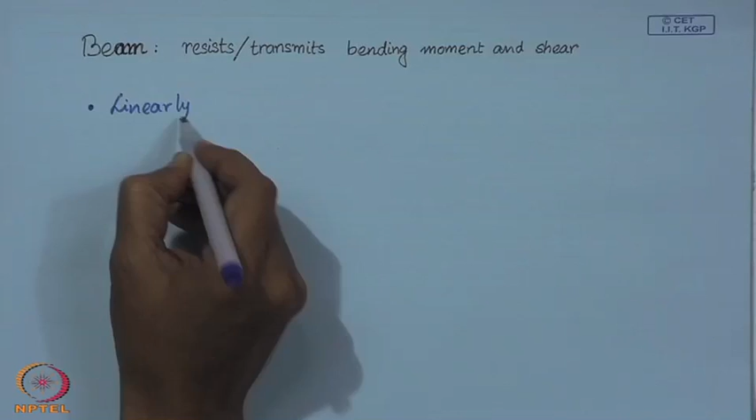The first assumption that we make is about the material: we will restrict ourselves to linear elastic material, which is of course also homogeneous and isotropic.

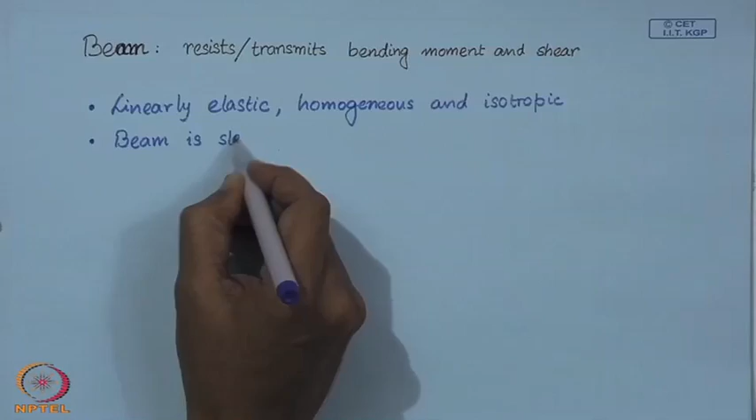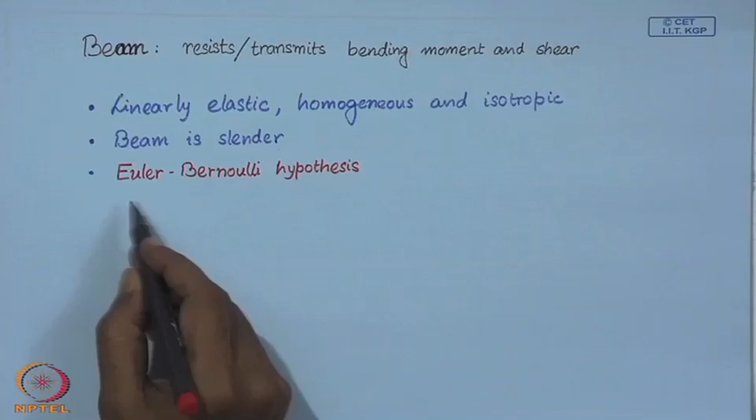The second assumption that we make is that the beam is slender. In today's lecture this will be an important assumption, under which there is this well known Euler-Bernoulli hypothesis. This Euler-Bernoulli hypothesis holds. So what this tells us is that suppose I have a beam.

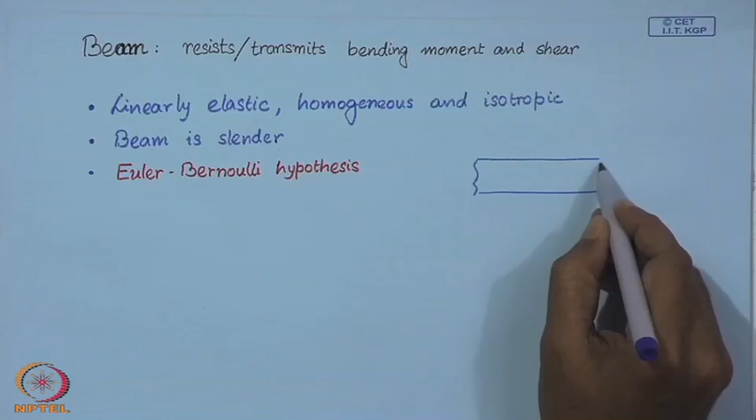So this is a section of a beam, and there is something called a neutral axis, or neutral fiber. When this beam deflects, it takes up a shape something like this.

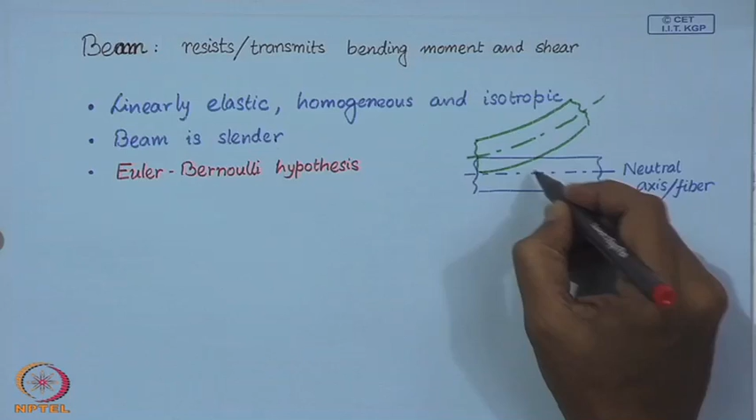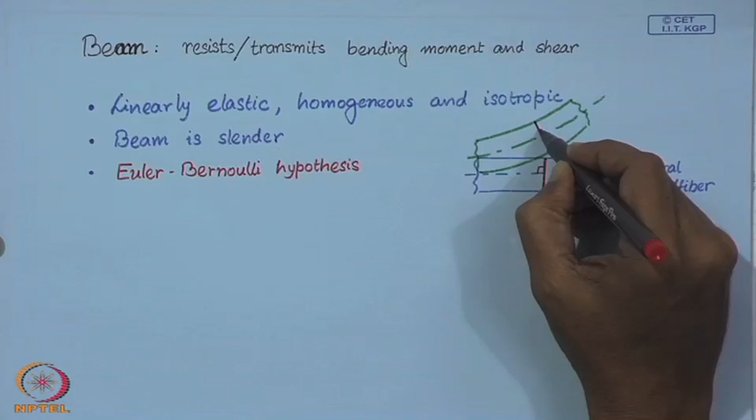So if you take a section of this beam before deflection, a plane section of this beam before deflection, which is perpendicular to this neutral fiber or neutral axis, then in the deformed configuration this section remains plane and remains perpendicular to the deformed neutral axis. So this is Euler-Bernoulli hypothesis.

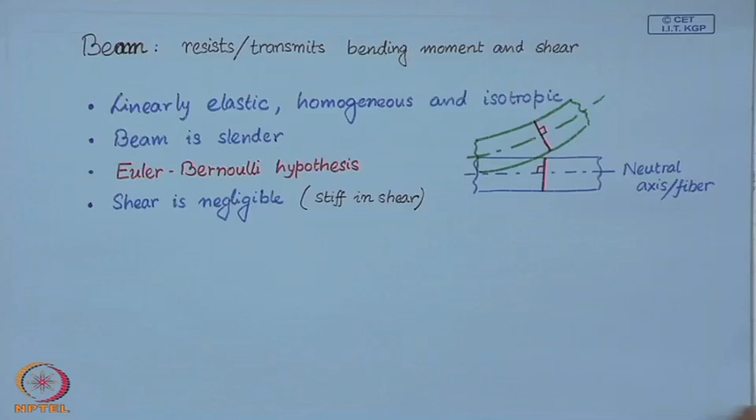Then we make the final assumption in the model that we are going to discuss today, that shear is negligible, or another way of saying this is that the beam is infinitely stiff in shear. So we will assume that the shear strain in the beam is negligible, and another way of saying this is that it is infinitely stiff in shear.

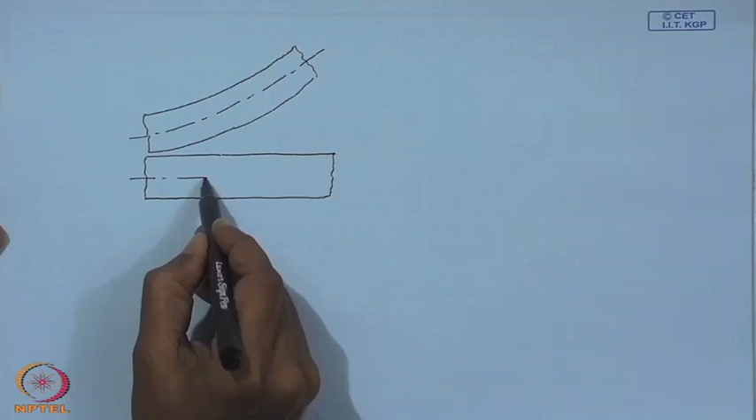So now with these assumptions, let us get down to modeling of the beam. So once again let me draw this section of the beam. So this is our neutral axis or neutral fiber. Now this is neutral, which means it is unstrained, it remains unstrained. So this axis in the undeformed configuration and in the deformed configuration remains unstrained.

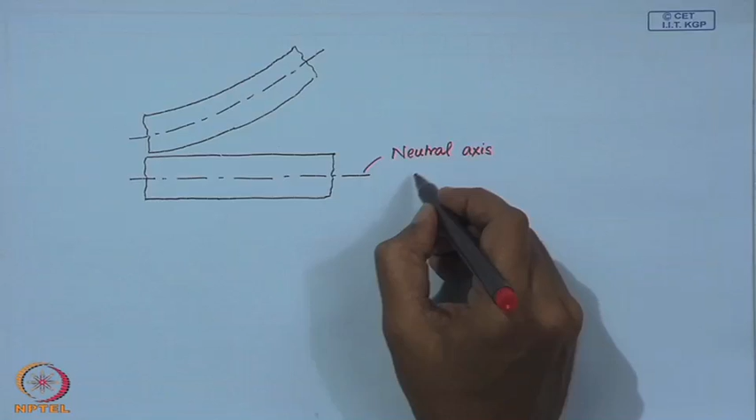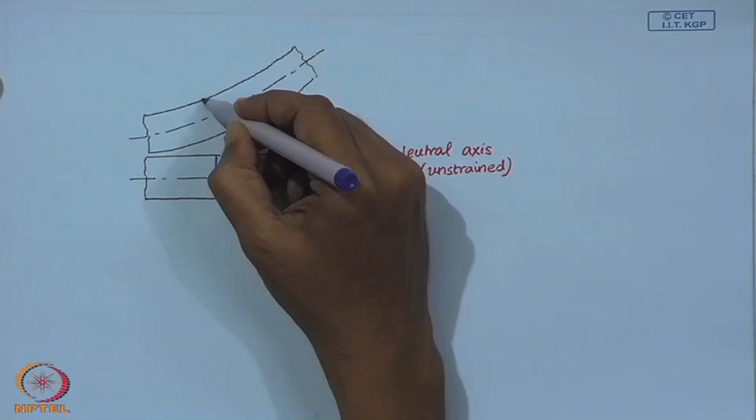So once again let us consider this element which upon deformation, this is an element which undergoes deformation. Let the depth of this beam or height of the beam be denoted by h.

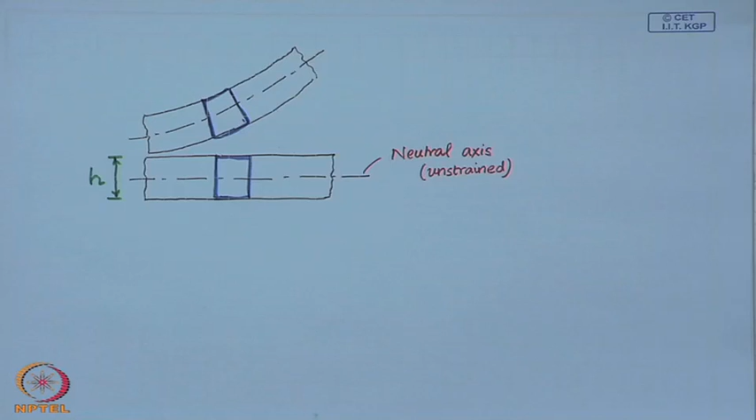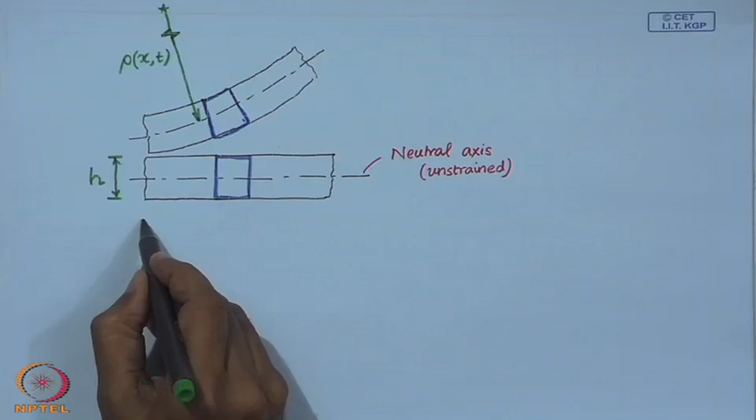Once this beam deforms, let us assume that the radius of curvature at this point, at x at time t, is given by rho of x and t. Now let us look at this element, let us draw the free body diagram of this element.

So let this element be of angle d theta in this plane. So this is an exaggerated figure. This angle is theta and the angular length is d theta.

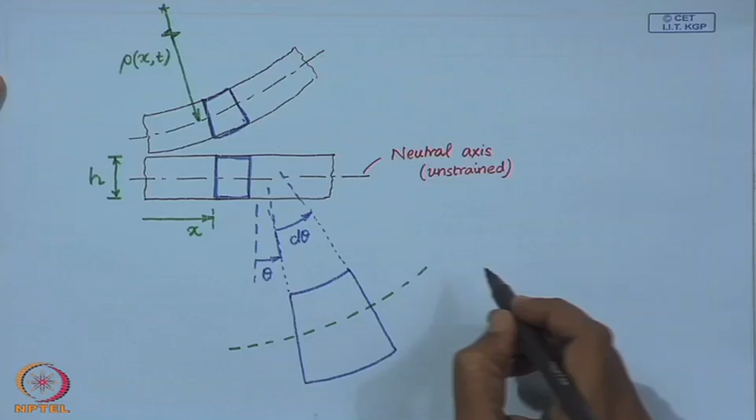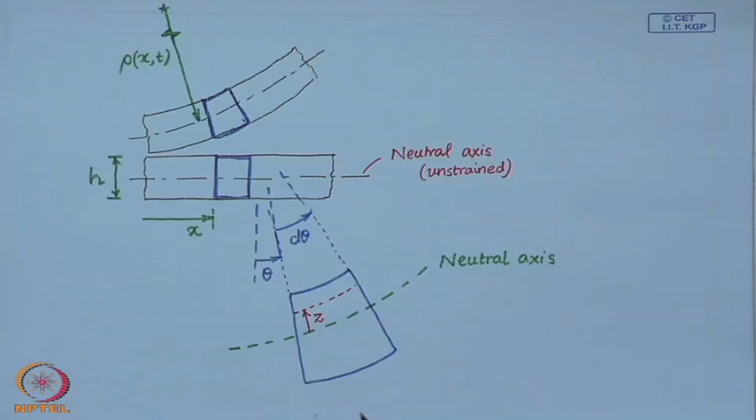Now let this be the neutral axis, then at a distance z measured from the neutral axis or the neutral fiber, let us look at another fiber. So we can write, first we are going to find out the strain in these fibers of the beam. As I mentioned, this neutral axis is unstrained. So let us look at another fiber which is at a height z from the neutral axis or the neutral fiber. Then I can write the strain as...

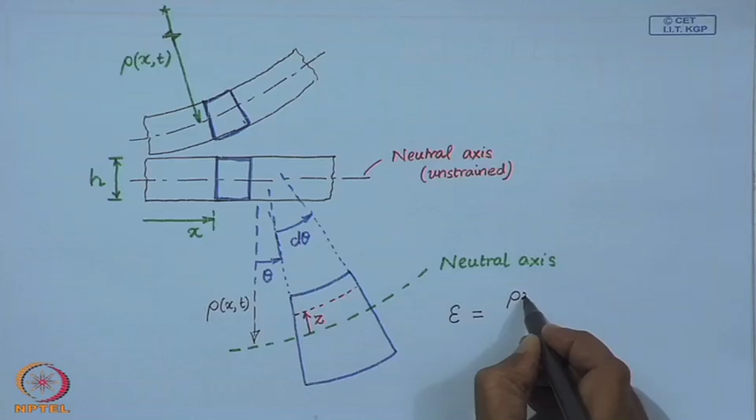So first I have to write the length of this fiber. Now this radius of curvature is rho. So the deformed length of this fiber can be written as rho minus z, times d theta. That is the length of this fiber. Its undeformed length before deformation, as you can see, is the same as rho times d theta. So since this length remains unchanged, this in the undeformed configuration was of the same length as this.

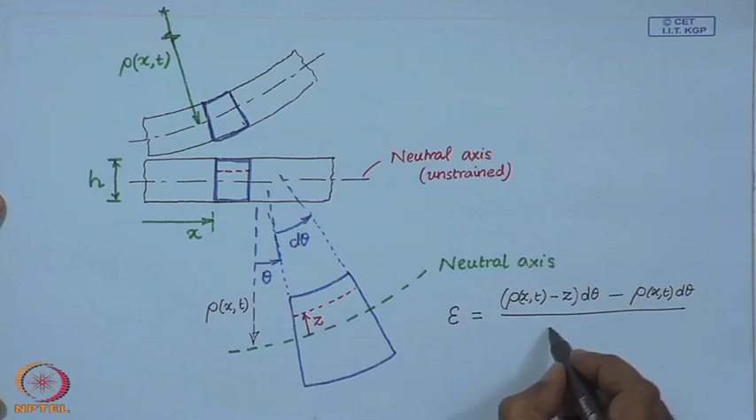So, its initial length was rho times d theta, and the initial length... therefore this turns out to be 1 over rho, 1 over the radius of curvature.

This is known as the curvature, and the expression of curvature in terms of the equation of this neutral fiber, if you represent that equation of the neutral fiber.

W x comma t is the displacement of this point from the undeformed configuration. So, the equation of this curve is given by W x comma t at any time t.

In terms of the equation of this curve, the curvature can be written as the double derivative with respect to x of W, divided by 1 plus del W del x whole square, raised to power 3 over 2.

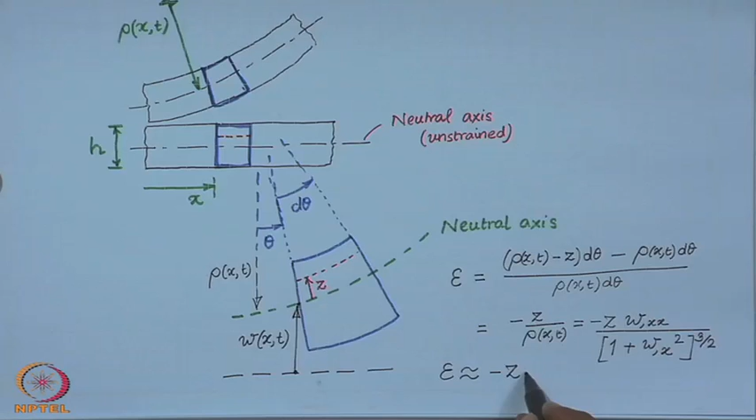As minus of z times the second derivative with respect to x of W. So, W is our field variable. This is under the assumption that the slope of the beam at any location is much smaller than 1, so our strain simplifies to this expression.

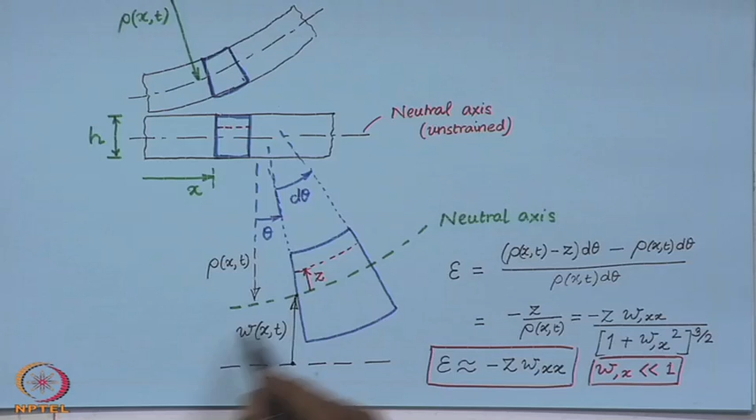This is the strain in this fiber at a height z measured from the neutral axis, and thus we have the strain in terms of the deflection of the neutral axis, which is what we are going to track. So, the deflection of the beam will be represented in terms of the deflection of its neutral axis.

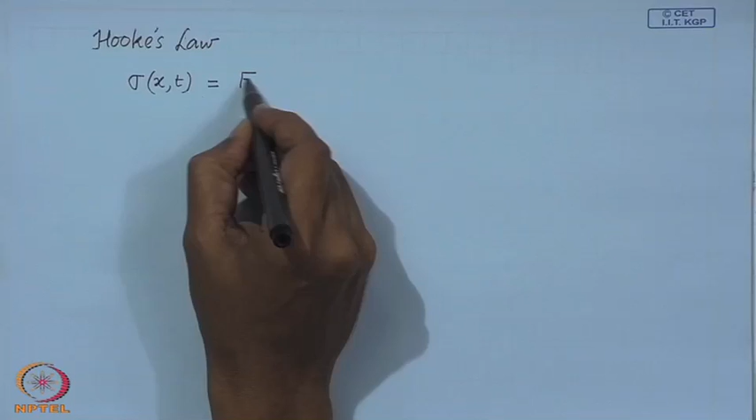Once we have this expression of strain, we can bring in the constitutive relation using Hooke's law, and we can write the stress in that fiber at a location x at time t. This is the axial stress in the axial fibers of the beam at a location z measured from the neutral axis.

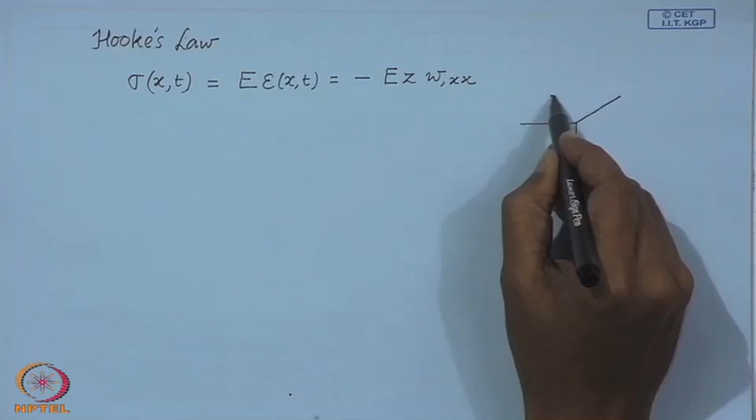Now, this stress, as you can see, is linear in z. So, let us consider a cross section of this beam.

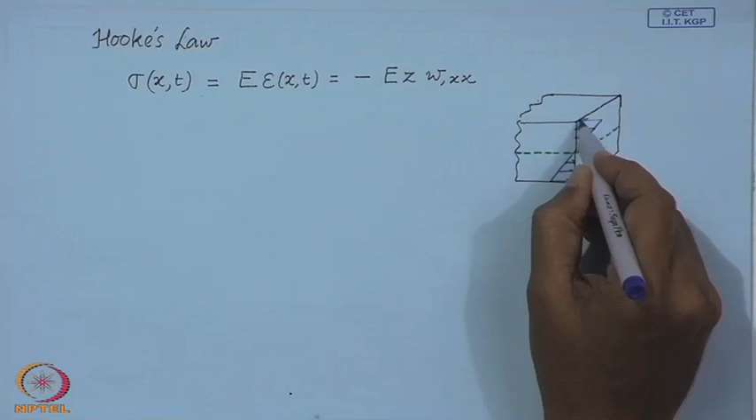This is the neutral fiber plane, and if you represent the stress, then if z is positive, we are measuring z from the neutral axis positive upwards.

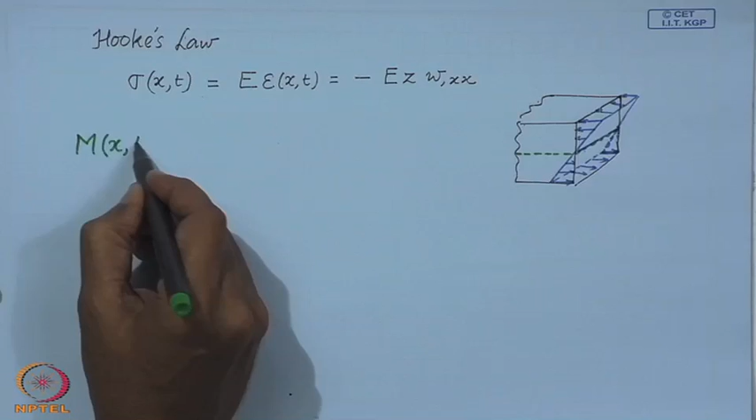Now what we want to find out is the moment that comes because of this stress distribution on the cross section of the beam. So, the moment at any location x at any time t will be given by.

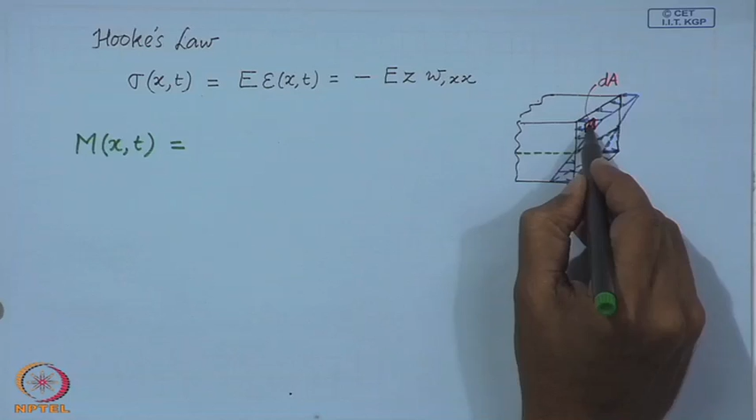If dA is a little elemental area on this cross section, then the force acting on this area is given by sigma times dA, and the moment about the neutral axis, because we are going to find the moment about the neutral axis because of this stress distribution, is given by this arm z cross this force, and if you do that calculation, that turns out to be negative of this, integrated over the total area A.

If you now substitute these expressions, this negative and this negative turns out to be positive. Now Young's modulus and the curvature, the approximate curvature, does not depend on this area integral, so that can come outside, and what we have here is...

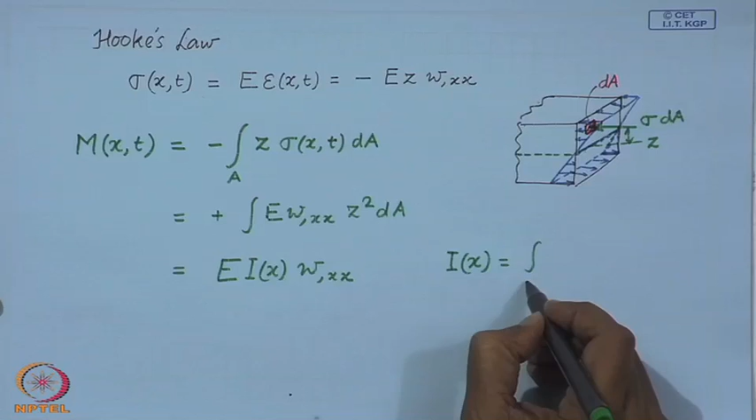This is known as the second moment of the area, about the neutral axis. So, this is the moment that is acting on this cross section.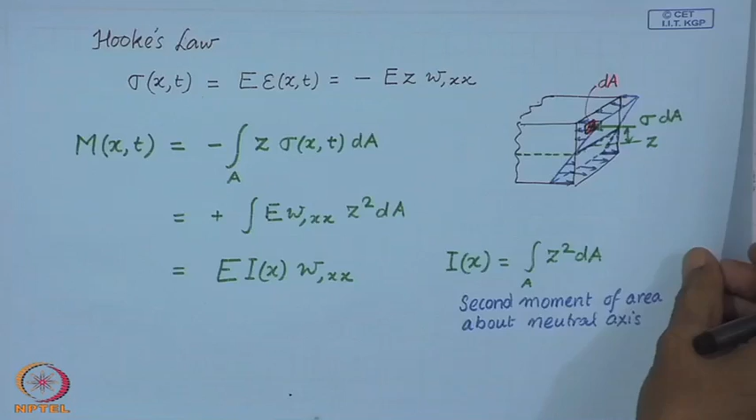Now, let us once again look at the free body diagram of this little element of the beam, and introduce the interaction forces. So, we have the shear forces at these faces.

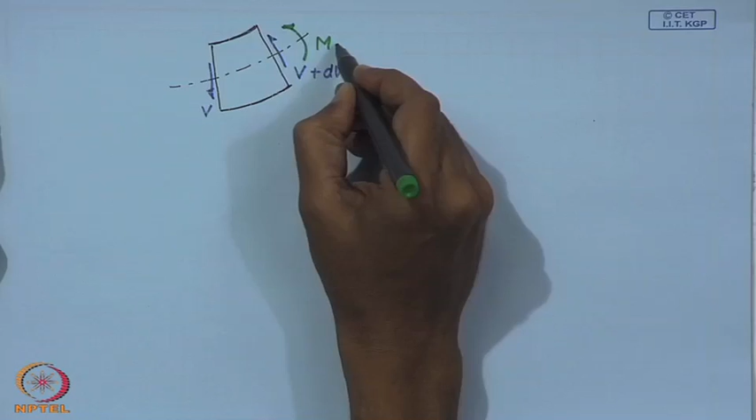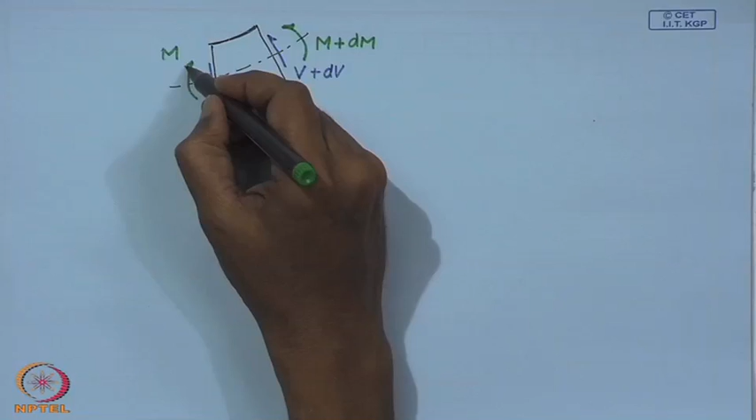And the bending moments. So, the sign convention that we follow: this is the positive shear force and bending moment.

So, this is the undeformed neutral axis, and this deflection is W x comma t.

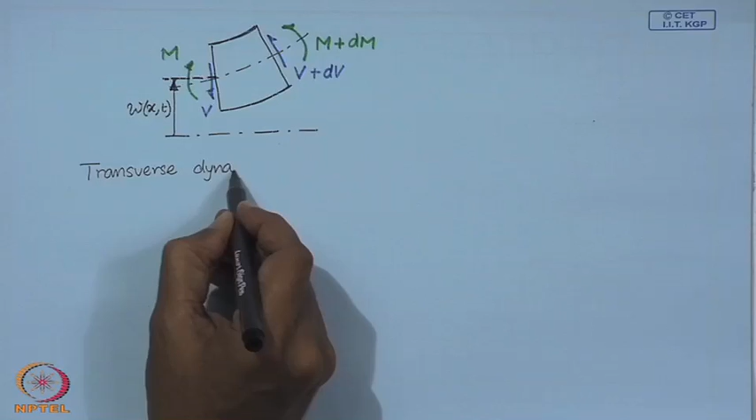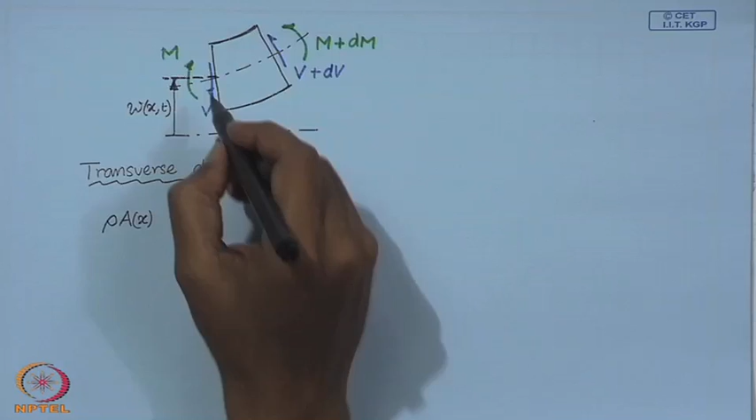Now let me write down the transverse dynamics, the equations of transverse dynamics of this little element whose free body diagram I have drawn. From Newton's second law, if rho is the density of the material and A is the cross sectional area at this location x.

Then rho times A is the mass per unit length, into dx, which is the length of this element. Then this is the mass of this little element times its transverse acceleration must be equal to... so, I can write...

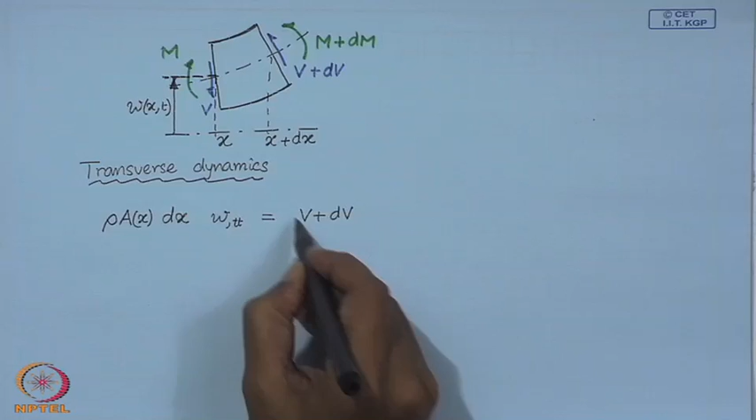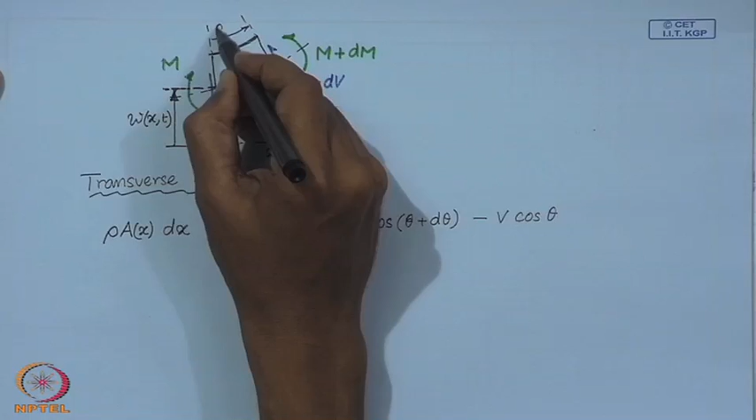Where, what I have indicated before, this angle is d theta and this angle is theta. So, I have taken the projection of these forces in the transverse direction, and if you divide by dx and consider that cos theta is approximately equal to 1, then this is the equation of transverse dynamics for the beam element.

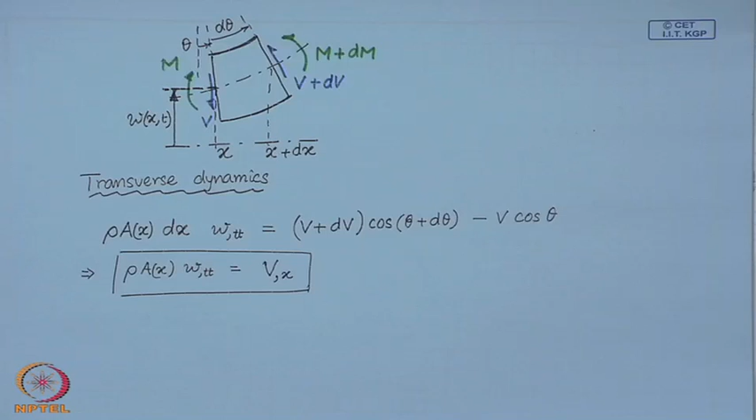Now, along with the transverse dynamics, I will also write the rotational dynamics.

If rho is the density of the material and I is the second moment of the area about the neutral axis, then rho times I gives us the moment of inertia of this element about this axis, which is perpendicular to the plane of this paper. This is per unit length, moment of inertia per unit length, so times dx will give us the moment of inertia of this element.

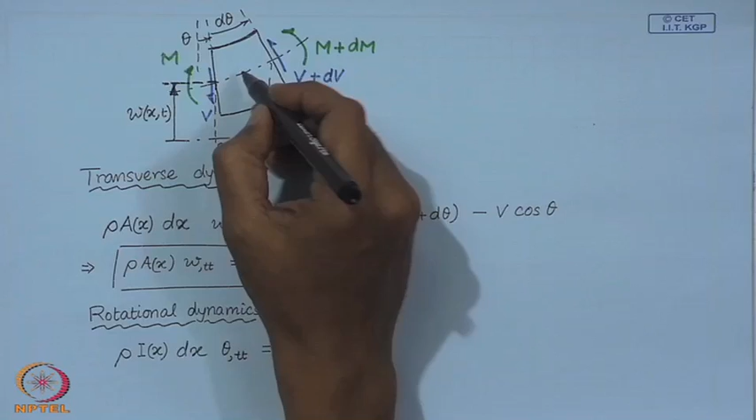This angular acceleration can be written as the double time derivative of this angle theta of the element, and this must be equal to the sum of all moments about the center of mass of the element. We are writing this rotational dynamics about the center of mass.

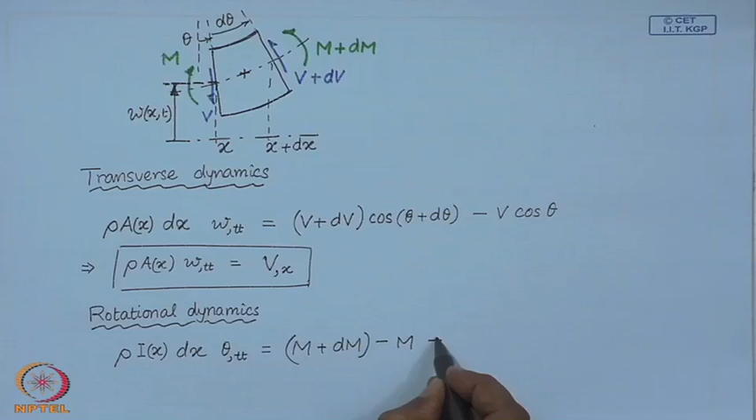So that turns out to be this, which implies, upon dividing throughout by dx...

Now this theta has to be somehow represented in terms of w. We know that tan of theta for small slopes is almost equal to sine of theta, which is almost equal to theta, and tan theta is nothing but the slope of the beam. Therefore, theta is approximately the slope of the beam.

Therefore, from here I can rewrite this equation as... Now, you see in these two equations, the bending moment M we have represented in terms of the stress, which was calculated in terms of strain, which was calculated in terms of the deflection of the neutral axis, or our field variable w.

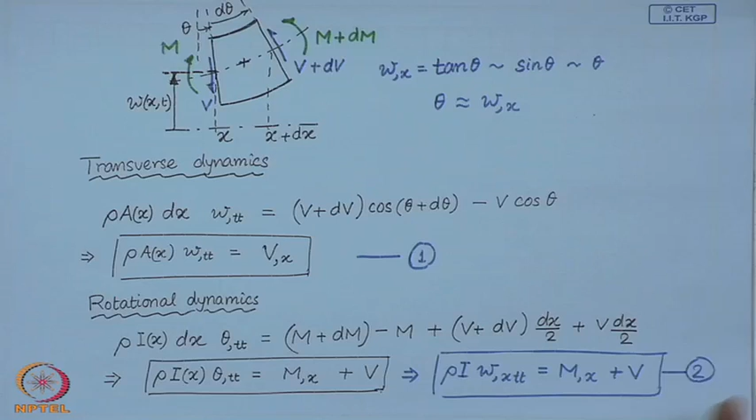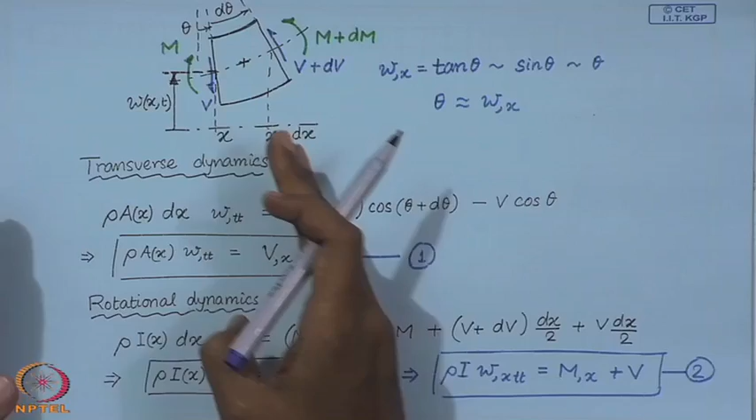Now this V, which is the shear force, is determined from these equations of equilibrium, because this element is not shearing. So this has to be determined from the equations of equilibrium, and that is what we have in these two equations. So we will eliminate this shear force between these two equations, and if we do that...

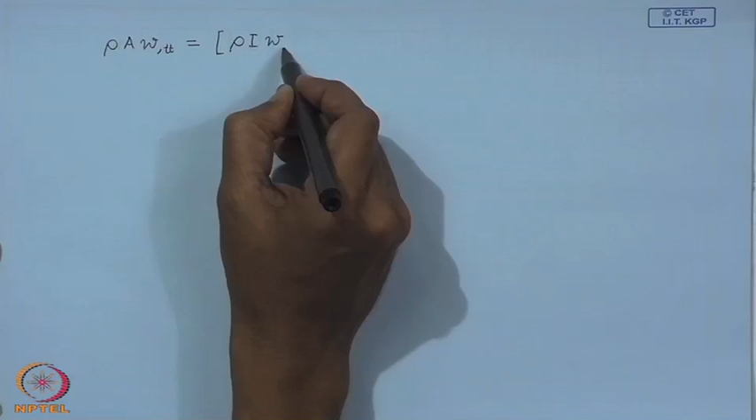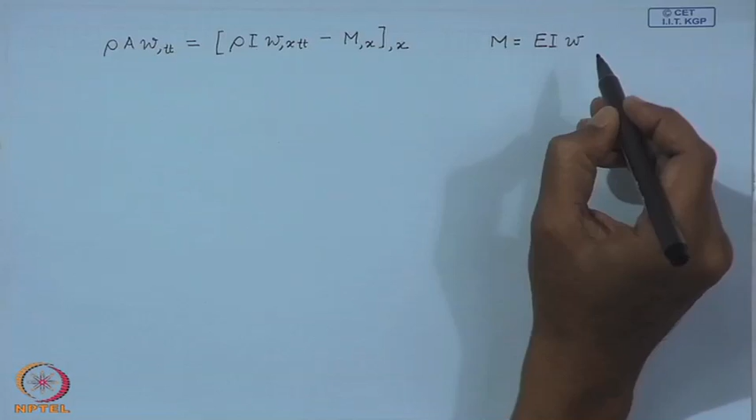So this was del V del x, so this is... and moment, the bending moment, we have determined this. So therefore, finally, if I rearrange this equation, so this is finally our equation of motion of the beam.

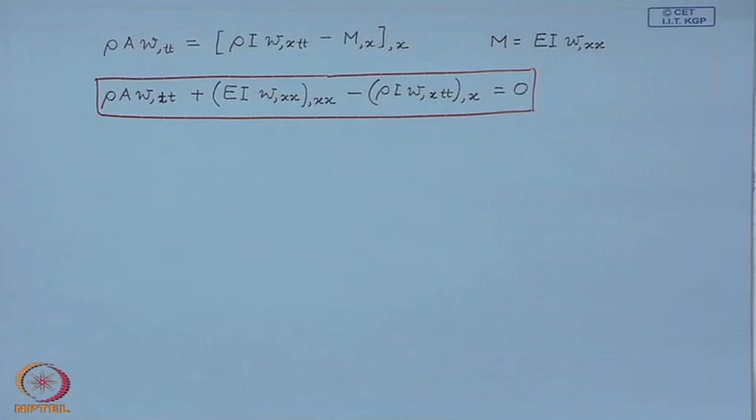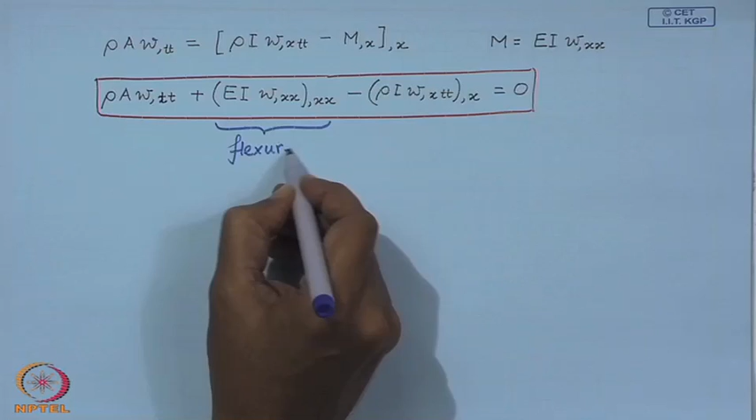Now here, this term is known as the flexure term, this term is the rotary inertia term, and this is the normal transverse inertia term, translational inertia term.

So this model of the beam is known as the Rayleigh model of the beam, or Rayleigh beam model. So in the Rayleigh beam model we have the inertia term, the flexure term, and the rotary inertia of the element.

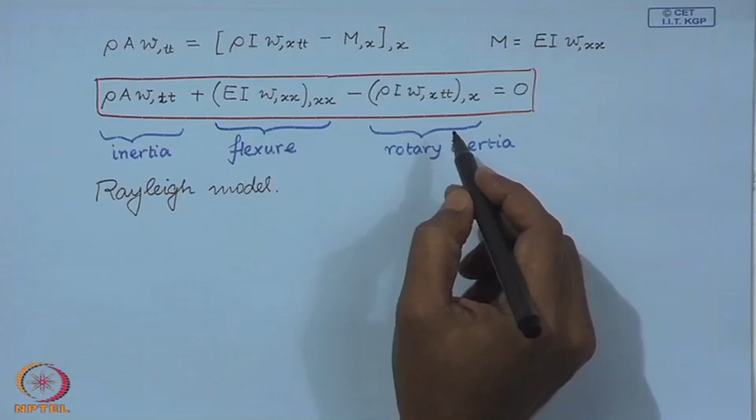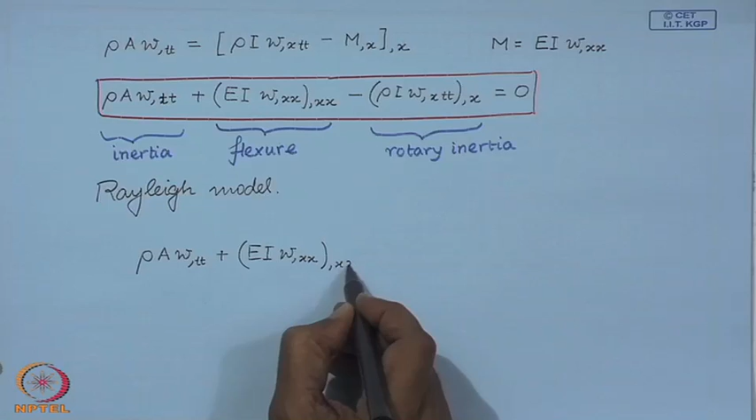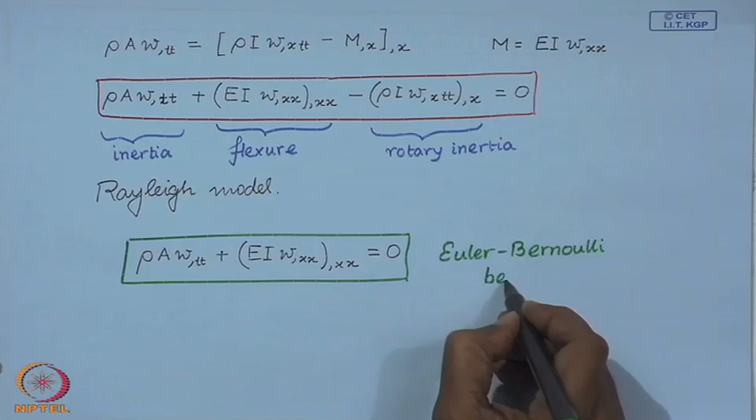For very slender beams, this term can be neglected, and in that case this is known as the Euler-Bernoulli beam model. So the Euler-Bernoulli beam model does not have this rotary inertia which is present in the Rayleigh beam model.

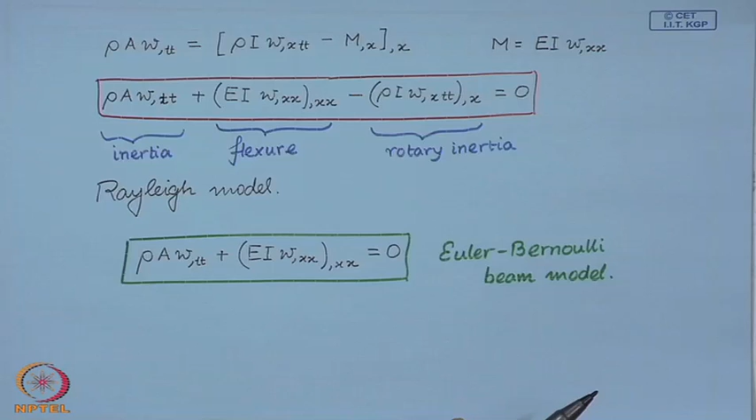Now when you have forcing, then instead of this zero on the right hand side, you have the force distribution. So these are two very simple models for beams. Next, we are going to discuss the variational formulation for beam dynamics.

As we have seen before, this variational formulation gives us a very powerful alternative way of deriving the equations, and not only that, we also get the boundary conditions, which we have not talked about yet, the possible boundary conditions for the problem. This variational formulation also gives us some very powerful techniques for approximately solving or discretizing the equations of motion, as we have seen in our previous lectures.

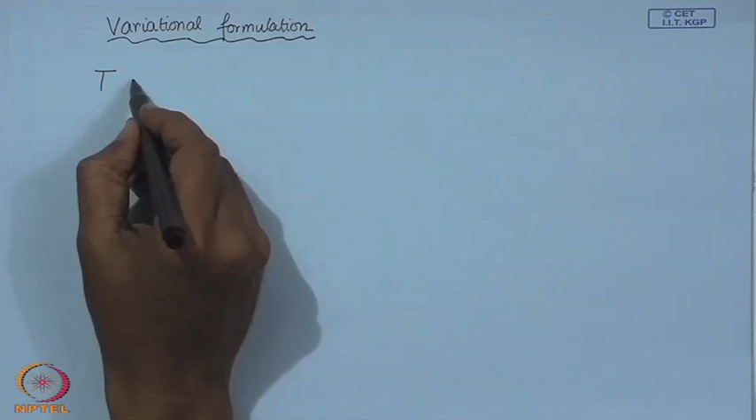So let us discuss the variational formulation for the beam model. Now, the first thing that we do in this variational formulation is write down the kinetic and potential energy expressions. So the kinetic energy of the beam can be written as the translational kinetic energy...

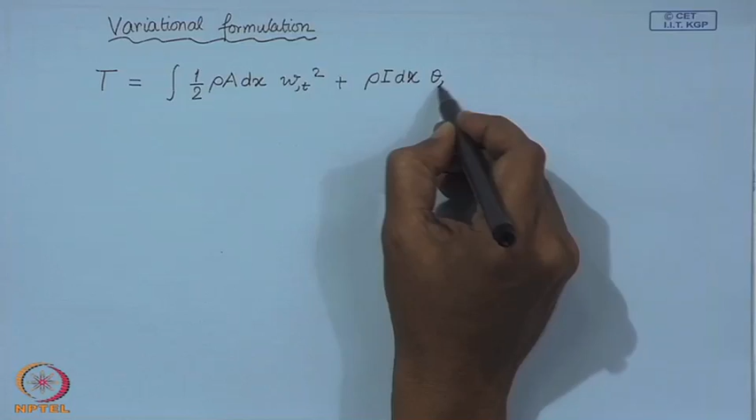So rho A is the mass per unit length, so into dx will give us the mass of a little element times the velocity square. That is the translational kinetic energy, plus the second moment of the moment of inertia of the little element times the angular velocity square and half, and this when integrated over the length of the beam will give us the total kinetic energy.

Now, using this approximation, we can now rewrite this. So that is the kinetic energy expression of the beam element.

Now, the potential energy of the beam, we know that the potential energy per unit volume for a linearly elastic material is given as half the stress times the strain. So over the volume, dA is the small area of the cross section and dx is the small length of the element. So if we integrate this over the area and over the length, then we should have the potential energy.

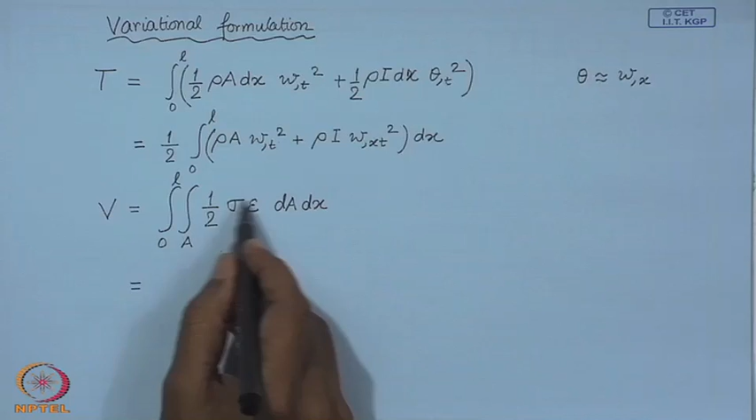Now if you insert the expressions of stress and strain in this expression, this is what you are going to get, and of course there is this 1/2. So this Young's modulus and the curvature square will have nothing to do with this area integral, so they can come out, and what we have is z square dA integrated over the area, and that we already know.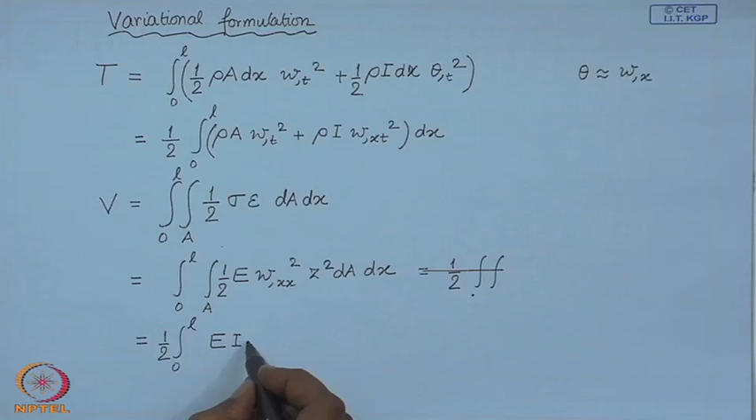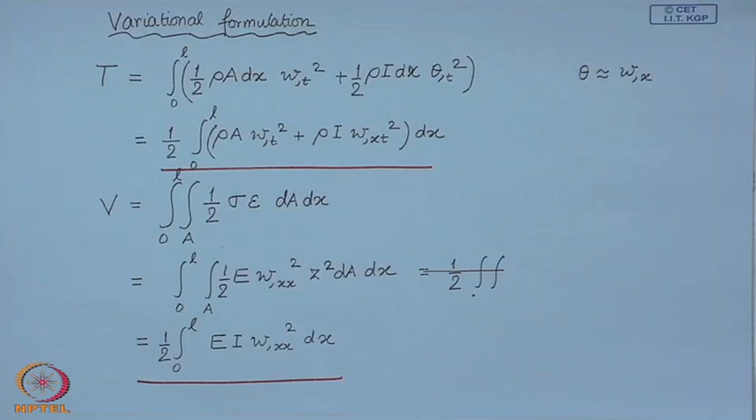Is the second moment of the area about the neutral axis of the beam. So, these are the expressions of the kinetic and potential energies.

Now, when we derive the equation of motion using Hamilton's principle, we write it like this mathematically. So, this turns out to be the statement of Hamilton's principle. So, when you take the variations,

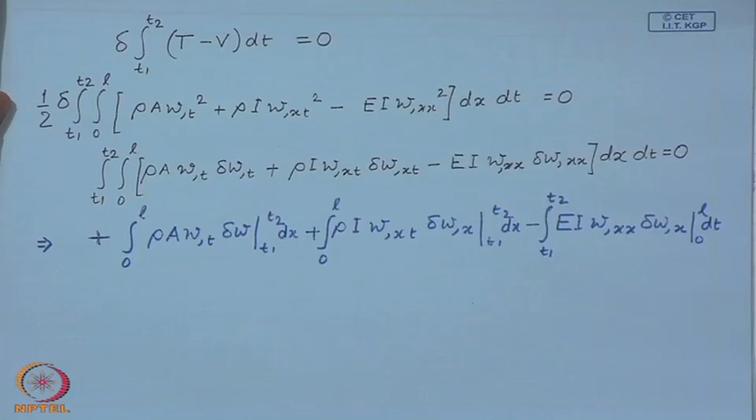And this I have to integrate with respect to space. So, this will get a derivative with respect to time with a negative sign. This will get similarly

So, this is what we are going to get. Now, here as we know that the variations must vanish at these two time points, so these terms will vanish. So, we will be left with this as a boundary term. Now, here still we have this space derivative, which we can once again integrate by parts with respect to the space, and if you simplify,

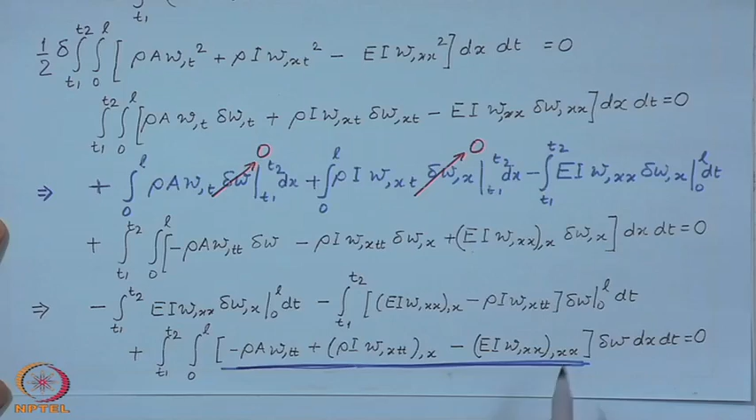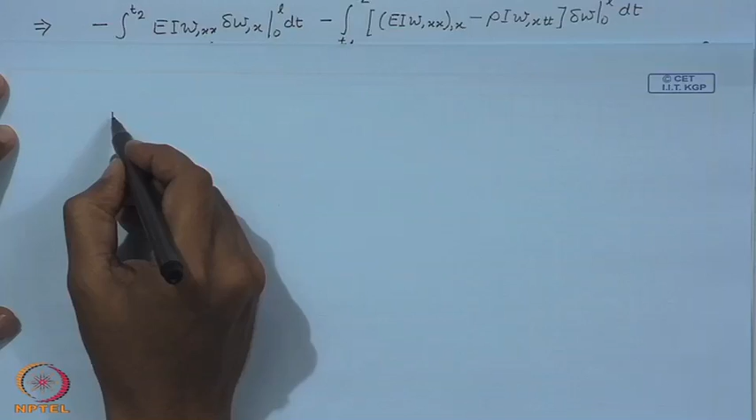Now, look at the boundary terms. Equation of motion we have already written, let us concentrate on the boundary terms. So, here we can have, so these are the boundary terms.

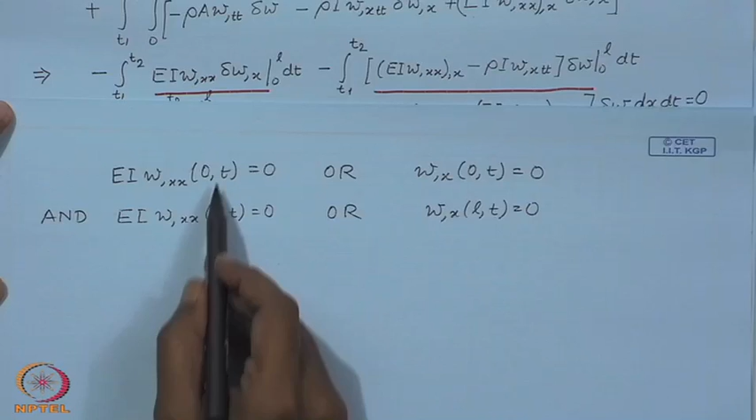So, we can have this at 0 to be 0, or we can have the slope at 0 to be 0 or fixed. Then at L again, or, and these two are connected by an and. So, you can have this and this, or this and this, or this and this.

So, combinations. So, this is from the first boundary term, from the second boundary term, which must again be connected with an and, or so here we have this displacement and so these are the possible boundary conditions.

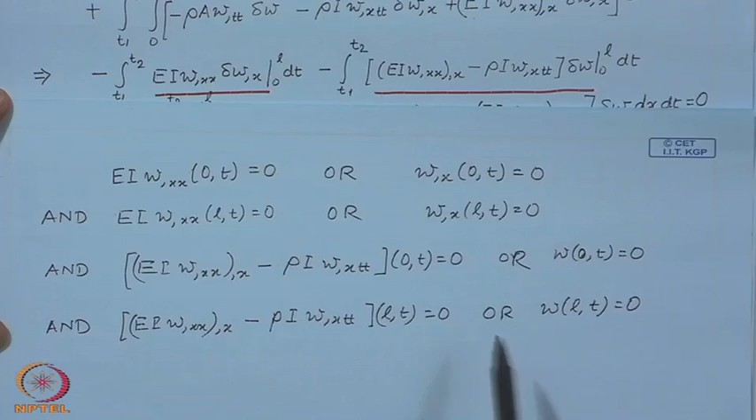So, this, as we can recognize, is the bending moment is 0, or the conjugate of the bending moment is the angle, the deflection, that must be 0, or this is the shear force. Now, this is an additional term because of rotary inertia. So, this must be 0, or the displacement, which is the conjugate of this. By conjugate I mean the product will give us energy or work. So, either force or its conjugate, which is displacement, is 0, either moment or its conjugate, the angular displacement, must be 0.

Now, this set of boundary conditions are the geometric, or also known as the essential boundary conditions, and this set is known as the dynamic boundary conditions.

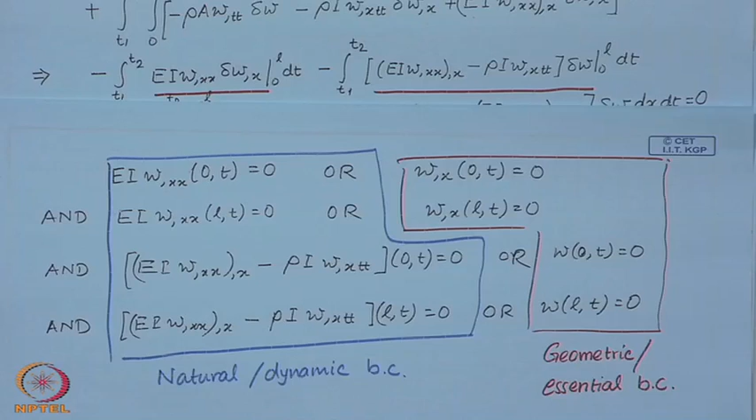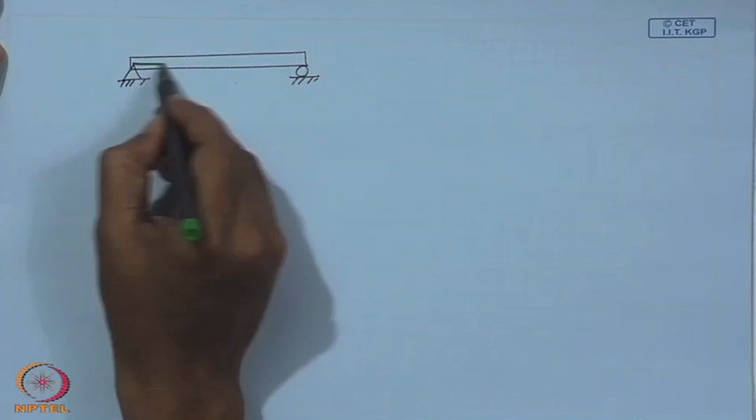Now, let us quickly look at an example. So, we know that we have simply supported beam like this. So, the boundary conditions here and the bending moment similarly here you again have

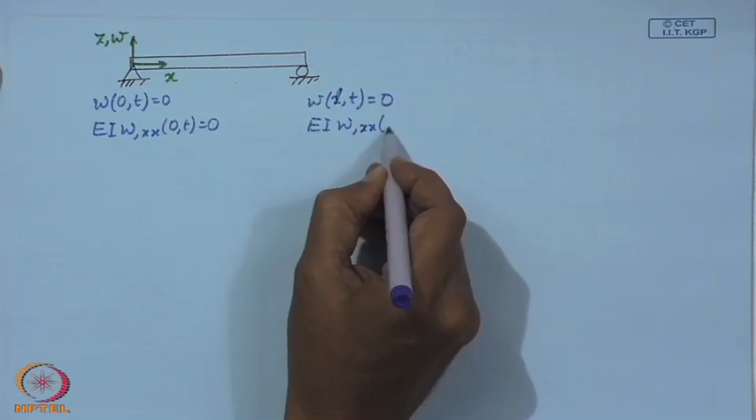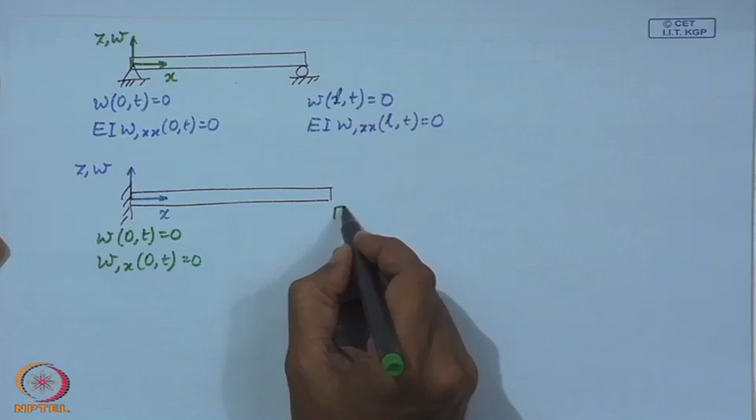the deflection to be 0, for a cantilever beam. The boundary conditions here, deflection 0, and you know that slope is also 0. Here we have the shear force and the bending moment to be 0.

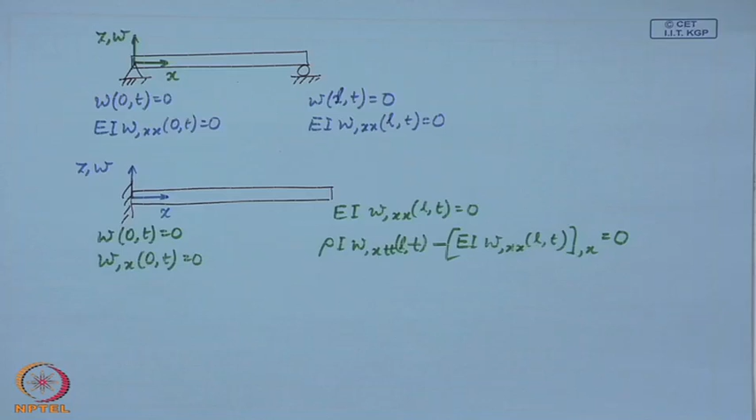So, these are two examples that we have considered where we have written out the boundary conditions. There can be other examples, and we will discuss these in the subsequent lectures. So, what we have discussed today, we have looked at some simple models of beam transverse dynamics of slender beams, and we have derived the equation of motion for the Rayleigh beam and the Euler-Bernoulli beam, and we have looked at the variational formulation from where we can also derive the equations of motion. So, we will continue this discussion in the next lecture.